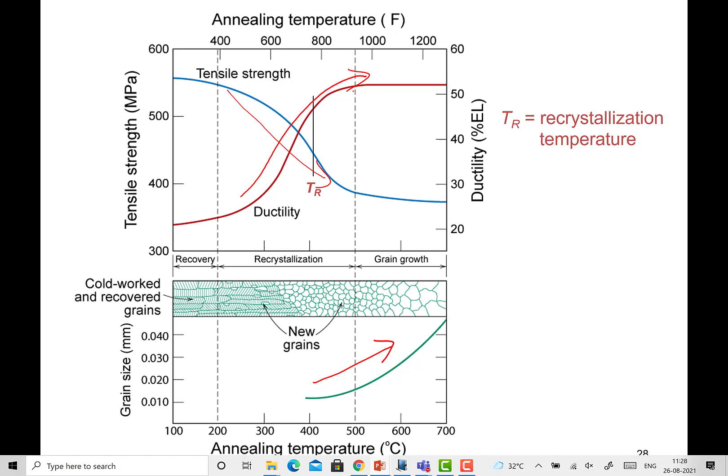These deformations will be lowering the recrystallization temperature, and thereby affecting the properties. With recrystallization, the kind of change in properties that occurs is something you can easily understand.

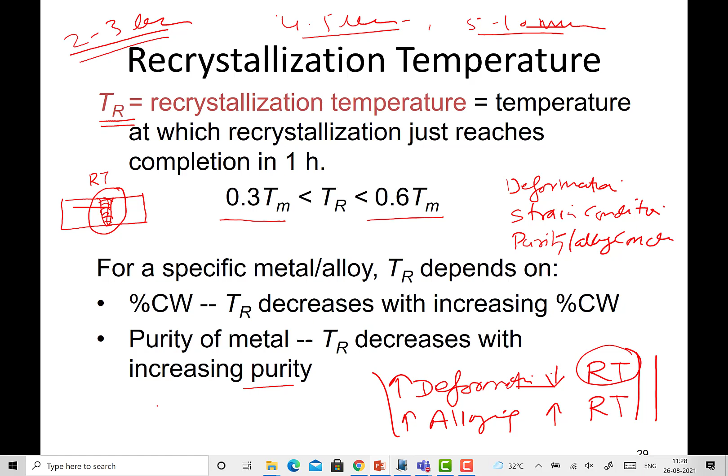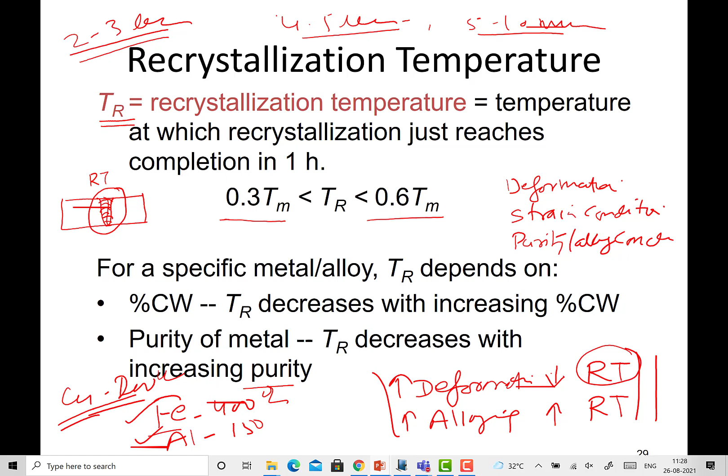Another thing is the decrease in purity. With increasing purity, the recrystallization temperature decreases. So for pure iron it is say 400 degrees centigrade, maybe for aluminum it's 150 - I'm not 100% sure, but there are different values for different metals. For copper it is 200 degrees centigrade. So the moment you go for alloying, there is a possibility these temperature values may be a little higher than the typical values for pure metal.

I hope this is a simple thing you already know - work hardening or strain hardening increases the dislocation density, and because of that your strength and hardness both will be increasing, but at the cost of your ductility and mostly the toughness as well.

So you can see this when a simple low carbon steel is subjected to different values of deformation, that's cold working, at different percentages say 0%, 4%, and 24%, the way the properties change. If you take any steel weld joint or metal subjected to deformation, it will be experiencing change in properties, and this is indicative - strength has gone up with say 4% cold working and there's reduction in ductility. Earlier it was say 23%, now it is around 18 or 20, and this is further reduced with increase of cold working.

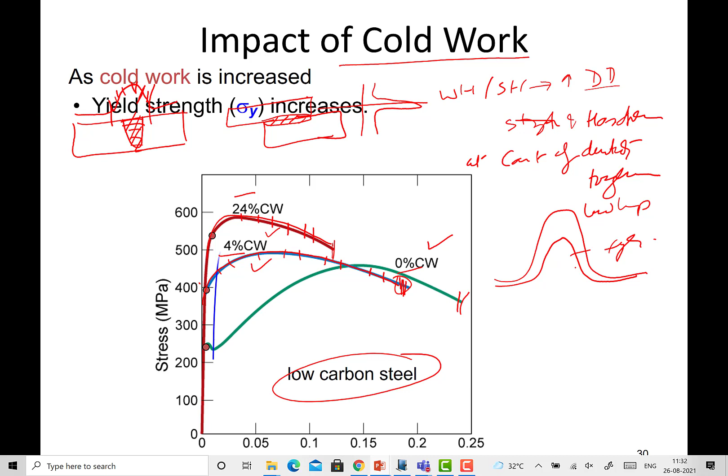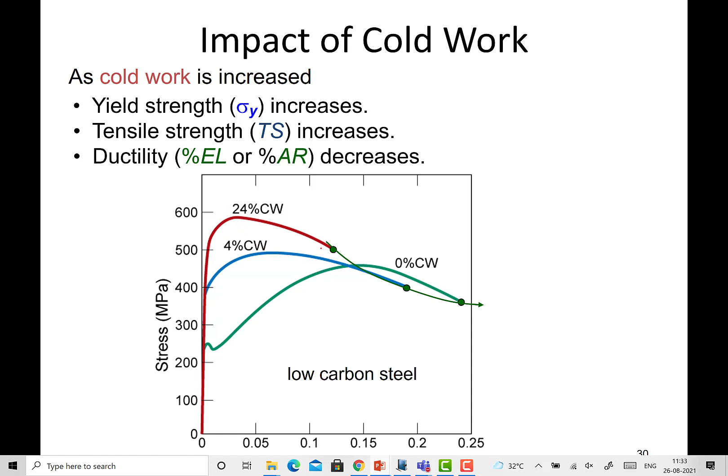So these are the kind of changes you can see. As the cold working is increased, yield strength increases, tensile strength also increases, and there is a decrease in ductility. So we'll go once again - there is an increase in yield strength, ultimate strength, and a decrease in ductility. This is what you can see using these lines.

Just for an example, if you see when copper is taken, the way by which the properties will change for copper with increasing percentage of cold working. So let's say when copper is worked, yield strength increases from around 150 value to around 350 value with the change of percentage of cold working for the copper. Likewise, there is a change in the tensile strength and reduction in the percentage elongation.

So this change is related with their ability to work harden. Different metals respond differently for these kind of changes. That is what you can learn from these curves, the way by which two metals, A and B, will be responding. In one case, work hardening is very limited beyond the yield point, and in another case work hardening is significant. So two metals respond differently for cold working and deformation.

So depending upon the metal which is being subjected to solid state joining and experiencing deformation, the kind of change taking place in yield strength, tensile strength, and ductility may change significantly depending upon its work hardening capability. For steels it is huge, likewise for copper, but for aluminium it is limited. This work hardening capability is usually linked with the stacking fault energy of the metal.

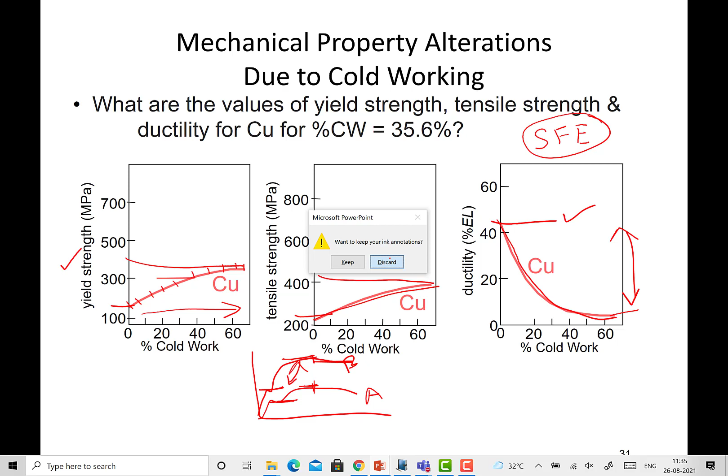Lower the stacking fault energy, higher will be the work hardening tendency of the metal. So high work hardening tendency metals like cobalt, austenitic stainless steel, and super alloys create a lot of problem during machining because of this hardening tendency. Cold worked metals will be experiencing the effect of heat more badly as compared to other metals. So this is an important thing, let me talk about this.

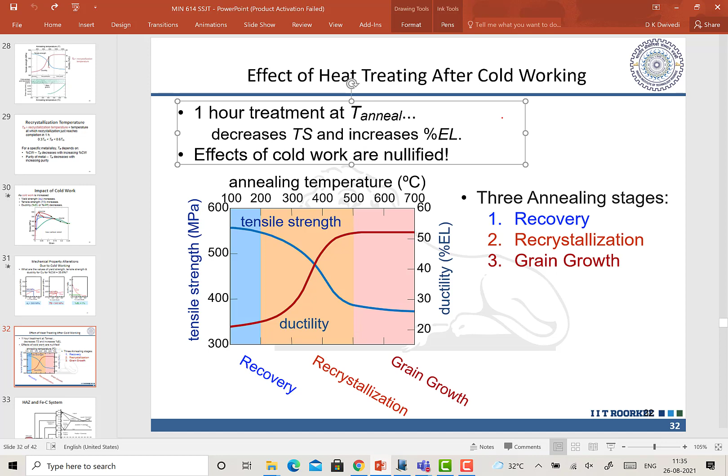Okay so here is your annealing temperature. Let's take two metals strengthened by different mechanisms when subjected to the same annealing temperature. One which is strengthened by mechanical working will be responding like this - this is what you have seen just now in case of copper or steel. So this large difference you can see is the temperature at which recrystallization is taking place, the recrystallization temperature. Here you can write this as the yield strength of the metal.

But if you take a metal which is not strengthened by cold working, or not strengthened at all by cold working, the annealing temperature may not be having that much effect. Say under identical conditions, if one is dispersion strengthened or transformation hardened, you may find that although there is a change, it is very marginal. So the drop which is taking place above the recrystallization temperature may not be huge. That will depend upon the relative contribution of the metal strengthening mechanism.

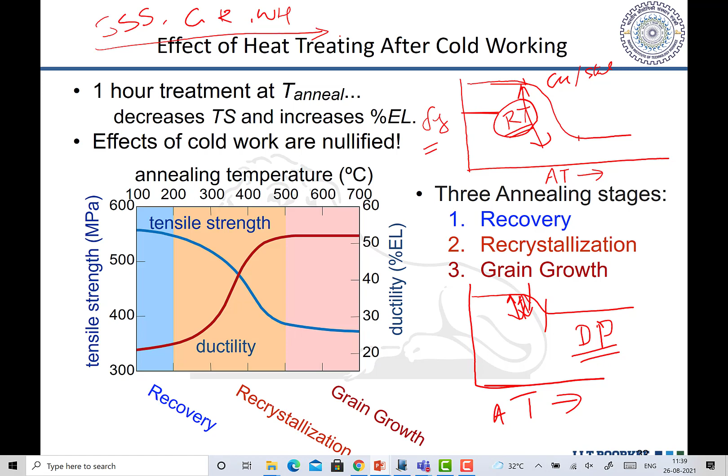Whatever drop you come across may be due to the minor loss of the work hardening effect that was there in the metal, because there is no commercial system which is strengthened by just one mechanism. They are always strengthened by multiple mechanisms. Invariably you will find the effect of solid solution strengthening, grain refinement, or work hardening, but the relative effect of these may be negligible or very less. So whatever effect these mechanisms have in a particular metal, only that will be neutralized or reduced, as per the way the metal is being subjected to heat or deformation.

This will give you a clearer picture for better understanding why in a joint, whether it's a joint of different metals, let's talk about how the heat affected zone of the four types of metals are affected, and what kind of changes take place in these four types of metals. They are strengthened by transformation hardening, work hardening, precipitation hardening, and grain refinement. Let's talk about these four different types of metal. If a metal has been strengthened by a combination of all these, then you will notice changes accordingly.

There is a combined change due to the heat applied, or increase in temperature taking place in the heat affected zone. For plain carbon steel, up to 730 there is no change in phase, except recrystallization. So this temperature band from about 400 to 730, new grains will be formed, and you can call this the recrystallization temperature zone.

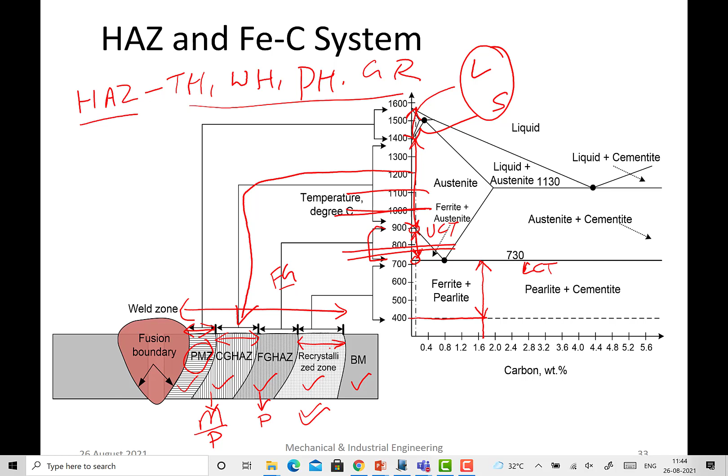If the temperature is limited to 800 degrees centigrade, you may have just fine grained zone, no coarse grained zone, okay, and refined grained zone and recrystallization zone. So this is important to be seen. If you take any metal and measure the temperature next to the weld nugget area and see what is the peak temperature, you can easily anticipate or estimate the kind of grain structure or phases which will be there in a particular region - in the coarse grain zone, heat affected zone, fine grained zone or recrystallization zone. So whether the temperature here is 1300 or 800, that will determine what you will be getting in this area.

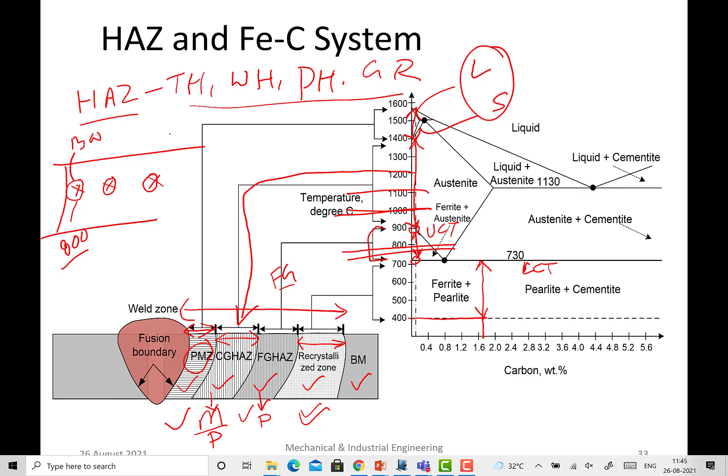So this is how you can link the rise in temperature in solid state joining to transformation hardening systems like iron carbon systems, and the way by which the changes will be taking place in the vicinity of the metal. I hope this is clear. Anybody can respond, is this clear? Because in solid state joining you may notice that the rise in temperature is not significantly high, so accordingly you will be getting the formation of different phases or different zones.

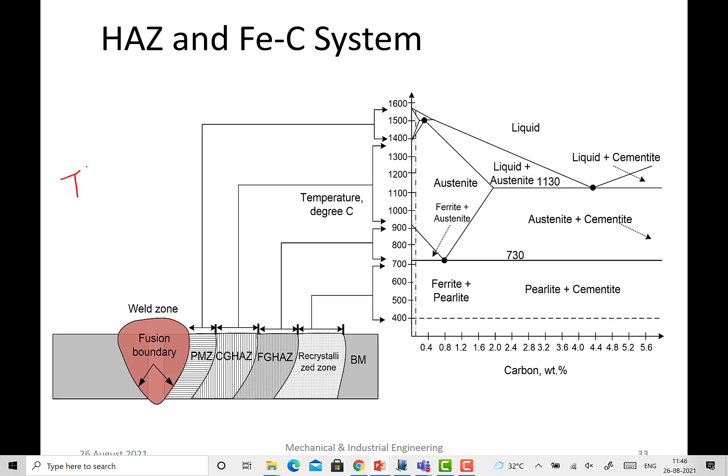This is one story of the transformation hardening metals. Now if you talk of other kinds of metals, it will be different. Let's say this is the work hardening metal - metals strengthened primarily by work hardening, and in aluminium alloys like aluminium, magnesium and manganese, this is one typical system which is strengthened primarily by this. And there are other systems like high manganese steels, which also get a lot of strength from deformation and work hardening.

So you see, the base metal which has been strengthened by work hardening means it is full of dislocations, right? And if you notice, the different zones will be experiencing different temperatures. Say take 4, 3, 2 and 1. What kind of peak temperature will they be experiencing? 4 very low, 3 little high, 2 further high, and 1 is maximum in the vicinity of the weld nugget or the joint interface. So since the peak temperature is high, you will notice that recovery will be taking place significantly and in very short time - complete recovery, formation of newer grains, even coarser grains.

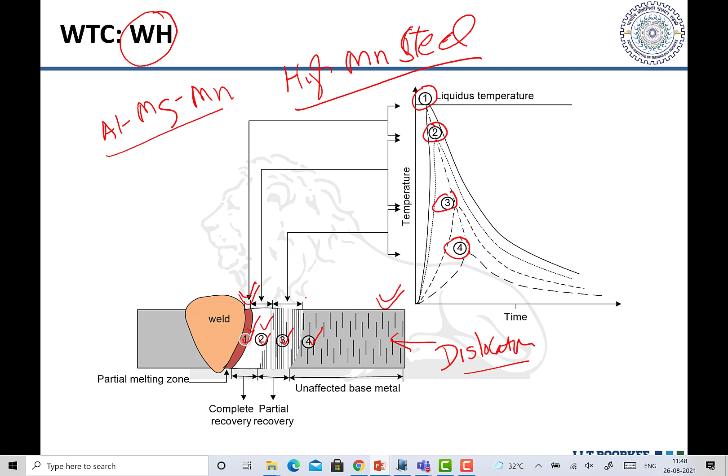There are three things that will be happening at location say 1 and 2. So this complete white location, what you can see here, just a minute. At location 1, this is where partial melting is taking place, because this zone may be falling in the mushy zone like in typical aluminium alloys. It goes in like this - this is the liquidus and this is the solidus, you have got a range, this is the two-phase zone. You may notice the temperature here is around 670 and this temperature is 530. So any zone falling in this band of temperature will have the two phases, leading to the formation of the partial melting zone.

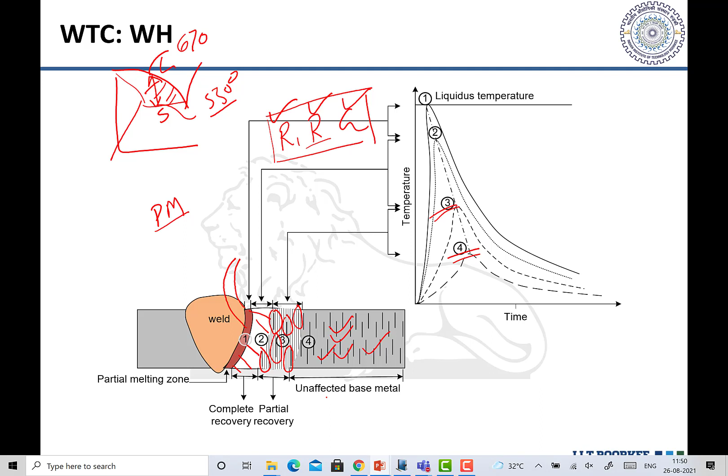Next to that is the zone which is being heated very close to the solidus, so that will be experiencing complete recovery, recrystallization, and grain growth as well, because the temperature is too high - all will be experienced in zone 2. If you see zone 3, which is experiencing a little lower temperature, you will notice the recovery is partial, because you can still see a few dislocations here and there, and recrystallization may also be limited. On the other hand, the zone which is far away from the weld nugget area is being heated to further lower temperatures, and you will notice there is no recovery, no recrystallization in zone 4. So the zone 4 is falling in an unaffected base metal, then partial recovery, partial recrystallization, complete recovery, complete recrystallization, and partial melting.

So this is the kind of structural change that will be experienced in work hardened metals. Now you know that when the base metal is having a large number of dislocations, the hardness is more. Hardness comes down gradually as soon as there is recovery - although recovery is partial, then there is complete recovery like this. So this is the complete recovery zone, this is the partial recovery zone, and then this is the unaffected base metal.

The loss of dislocations leads to reduced hardness and reduced strength, forming the weak zone. On the other hand, if it has been formed by a solid state joining process, the deformation may cause a jump in hardness because this zone experiences the work hardening effect. If it has been developed by a fusion process, everything will be lost and you will only have the cast structure. So this is the story of the heat affected zone of work hardened metals.

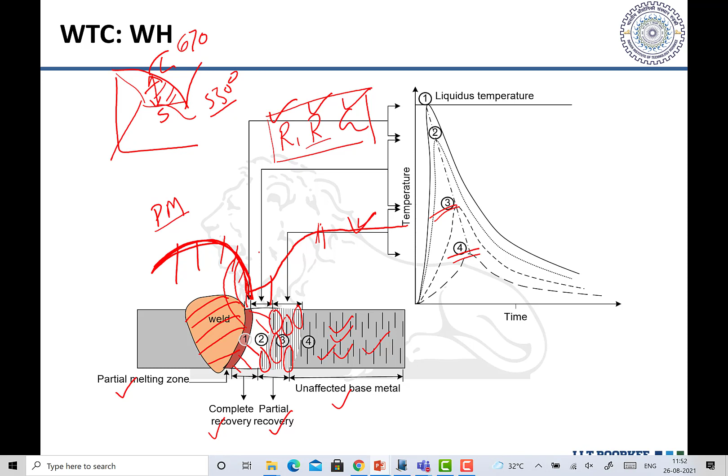Now, talking of precipitation hardening metals, there are a number of systems like aluminium-copper, aluminium-magnesium-silicon, and aluminium-zinc-magnesium alloys. So the 7000 series aluminium alloy, 6000 series aluminium alloy, or 2000 series aluminium alloy - these are the three series developed using the precipitation hardening approach.

If you take the precipitation hardening mechanism, you will notice a typical diagram of this kind. Here you may have different precipitation curves or lines, and this is the solvus line, with the homogeneous region here. So if you take your alloy composition here...

The hardening phases, as soon as they are heated above a particular temperature, start getting dissolved, and they are completely dissolved as soon as you reach above the solvus line. So here this is the alpha phase - everything is getting dissolved in this zone, so all fine precipitates have got dissolved.

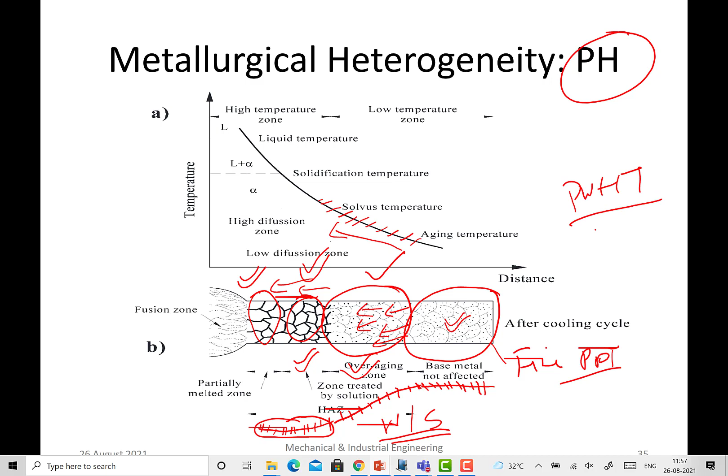In order to restore properties similar to the base metal, there are two ways - you go for PWHT, either T6 kind of condition or T4, just solutionize and put it under the welding condition. There are also naturally aged metals like aluminium-zinc-magnesium alloy - you weld it, and after a week or so it will regain its strength. But that is not so for 2000 and 6000 series aluminium alloys.

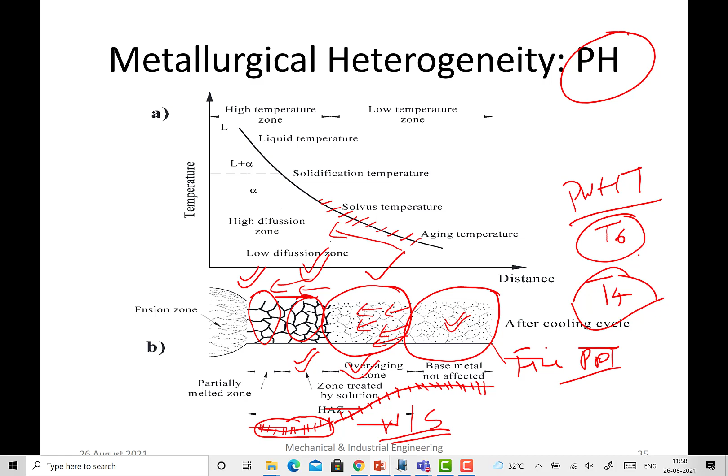This is not indicating well. This one will be more helpful to explain what I want to say.

Let's talk about this. The zones at different distances from the weld nugget area experience different temperatures. Increasing temperatures at location 1, peak temperature is high; location 2, peak temperature is somewhat lower, further lower. Beyond this, the base metal is really not affected, so the strength is really good.

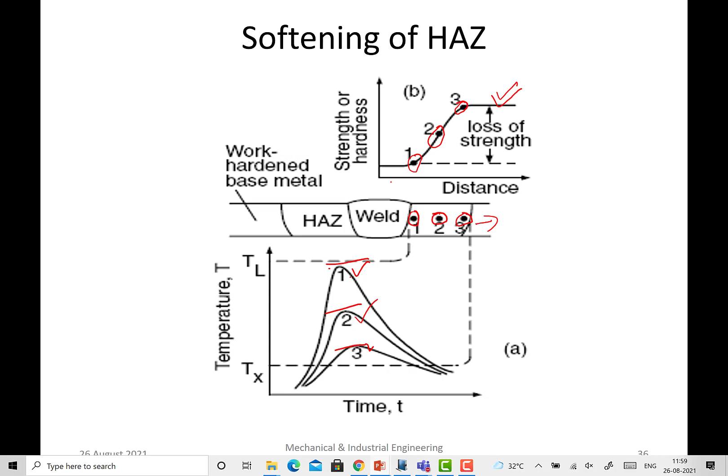Now what happens when you apply different amounts of heat, say 0.2 kilojoule per mm or 0.5 kilojoule per mm or 2 kilojoule per mm? There is a lot of difference. When you apply less heat, you get a very small nugget size and a very narrow heat affected zone.

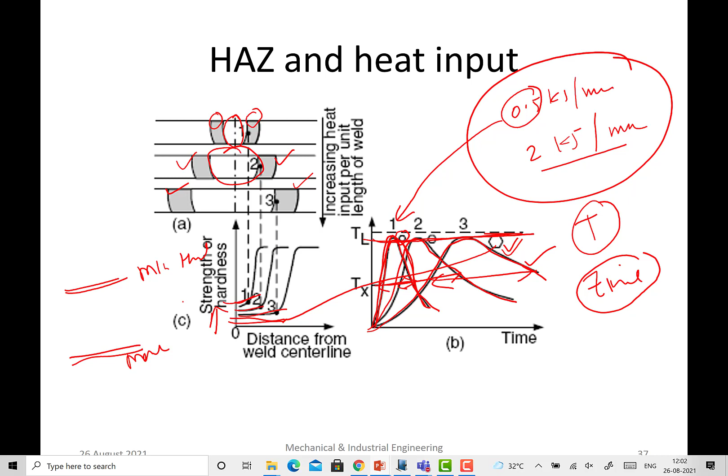For maximum heat, the minimum hardness is here; for minimum heat, the hardness is higher; and for medium heat it is here. That's what you can see in this plot. So the minimum hardness is here for minimum heat input, here for somewhat more heat input, and further lower for even higher heat input.

So that's how you can relate the kinds of changes taking place in these four types of heat sensitive metals: grain refined, work hardened, transformation hardened, and precipitation hardened. These are the kinds of changes experienced by metals due to the heat delivered during solid state joining.

So this is where I will stop. This is just one aspect I have talked about. I hope you can now understand how the HAZ of different metals will be affected by the heat applied during solid state joining. About the weld itself we have already talked a lot earlier. So that completes the last section of the first chapter.